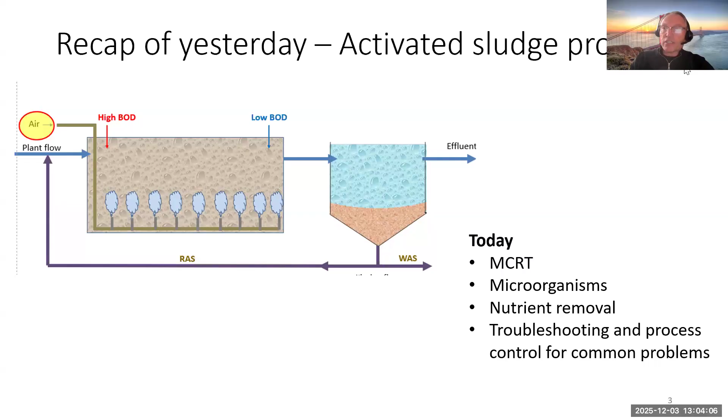We had a couple of questions yesterday, good questions that had us thinking, and we're going to address those coming up next. But just as a reminder here, the food to microorganism ratio, we had 2 pounds formulas. It was the pounds per day of BOD coming in divided by the pounds of mixed liquor volatile suspended solids, the biomass that we maintain in the aeration tank.

Now, the two questions we had, I did some research, and one of the questions was, can algae or vegetation growth occur in an active SBR, sequencing batch reactor cell, and how could it impact treatment? I did some research on this, and yes, algae growth can happen in a sequencing batch reactor. The characteristics of an SBR are that all of the functions, aeration and settling, and the return flows, it all happens in one tank.

And so you have these modes where you have it idle, you're filling it, then you aerate, and then you stop aerating and let it settle. So it all occurs in one tank, and it's a good solution for small systems. It's got a small footprint, but it's a little bit different operation to a continuous flow. Often systems will have at least two of these so that one can be filling while the other is treating, because wastewater never stops coming in from the collection system.

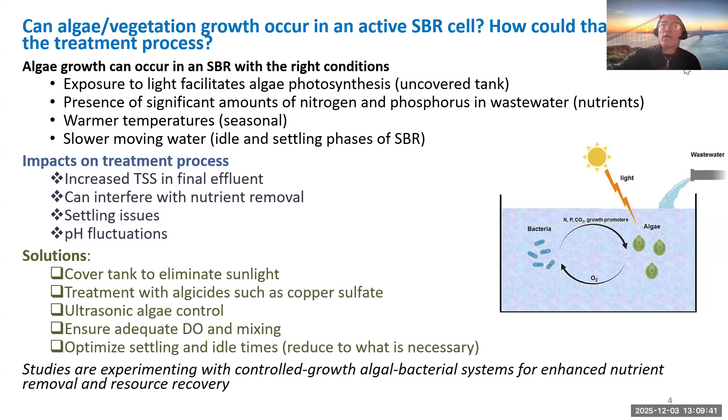And the other question was, Daryl partially answered this yesterday: can you speak on the historical justification for a 5-day incubation period in the BOD test? I had kind of wondered that myself, but for some reason never really took the time to look it up. As Daryl mentioned yesterday, historically it was the time for the wastewater to travel from the Thames River to the ocean, but there are some other justifications, reasons why this 5-day test occurs.

First of all is biological. The organic matter, the biodegradable organic matter, which is the BOD basically, is mostly consumed within a 5-day period. That's probably the more easily biodegradable matter. So after 5 days, you have a good idea of what your carbonaceous oxygen demand is. That's another way of saying the oxygen that is needed for bacteria and other microbes to consume the BOD.

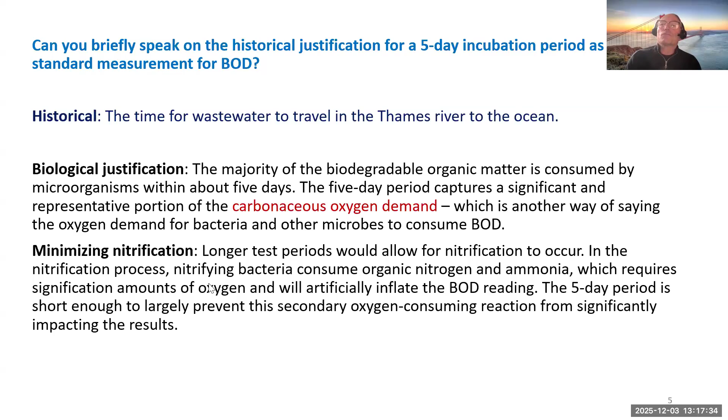All right, let's move on here, and we're going to start transitioning into discussing the mean cell residence time. As we just looked at here, we were talking about the F:M ratio. It's the pounds per day of BOD divided by the pounds of biomass in the tank, the MLVSS in the aeration tank. So we're trying to balance the food to the microorganism population.

In the MCRT, we're trying to get an answer of how many days the solids are remaining in the system. If you remember, we talked about yesterday, the effluent, the liquid, just travels continuously through the system, through the primary clarifier to the secondary clarifier, to the effluent. It's a continuous path, but the solids remain in the system longer because we're recirculating a portion of the solids in the return activated sludge back to the aeration tank.

So we're looking at the total pounds of mixed liquor suspended solids in the system divided by the pounds per day of solids leaving the system. So you notice in that MCRT formula, the pounds will cancel out, leaving only days. So you're going to get an answer in days. And the longer solids remain in the system, it changes the characteristics of the activated sludge.

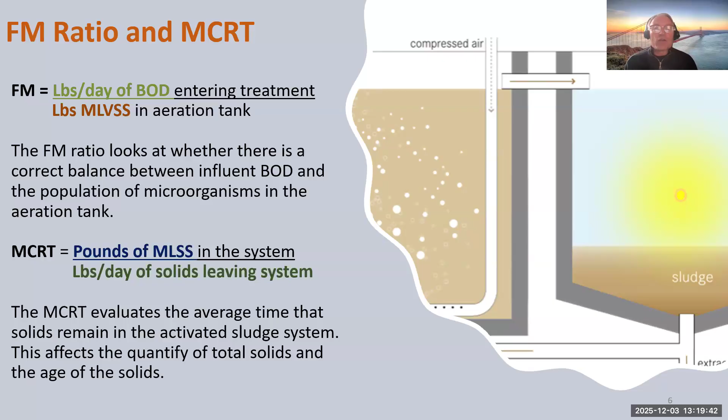There's a couple other things to think about, and we'll talk about this more a little bit farther into the presentation. But if you hold your sludge solids a little longer, it gives time for certain types of bacteria, nitrifying bacteria, to grow and develop. If you hold the solids too short of a time, you might not get good nitrification of the ammonia. If you're too short or too long, it can affect settling, and it can also affect the types of microorganisms that are in the activated sludge.

If we go over our process again, here's our incoming food and our return activated sludge flow going to the aeration tank. We're holding a certain concentration of MLSS in the aeration tank, the mixed liquor. We're maintaining a certain number of pounds of mixed liquor suspended solids.

We're settling out the biomass in the secondary clarifier, and we're recirculating. That circulation path helps us maintain the solids in the aeration tank. And then we have the waste activated sludge flow. That's how much we waste.

The waste activated sludge flow has the biggest impact, or the main impact, 99.99% of the impact, on how long the solids remain in the system, and also the overall amount of solids that are maintained in the system.

So if we increase the waste activated sludge flow, it's going to reduce the total time. It's like a detention time. We might be holding our solids for 8 days average before they leave the system. And if we increase the waste activated sludge flow, we might reduce it down from 8 days to 7 days, for example.

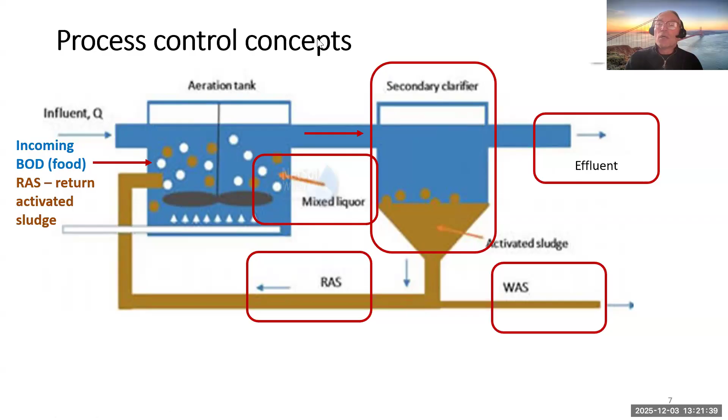And then, of course, the solids would go to some kind of solids handling. So these two process control calculations, it's not like you would do one or the other. You would do both of them. The FM ratio is balancing the biosolids you're retaining with the incoming BOD, and the MCRT is determining the amount and age of the biosolids that we're retaining in the system. We're basically trying to get these within the design specifications of the plant.

The mean cell residence time here - average time in days that the microorganisms remain in the activated sludge system. And there's our equation, the total pounds of MLSS under aeration. So we're going to have a pounds formula. And then the pounds per day of solids leaving the system.

That is mainly due to the waste activated sludge flow. And pounds per day of solids leaving the system, that's another pounds formula. So we're at least going to have 2 pounds formulas to calculate this MCRT.

Now, some solids also can leave in the effluent. If you look at an NPDES permit, you might see something like you have a limit of 20 milligrams per liter maximum allowable suspended solids in the effluent. And let's say you're achieving better than that. You have your effluent solids down to 11 milligrams per liter, which is probably successful treatment, but still there's some degree of solids leaving. So we can also account for those.

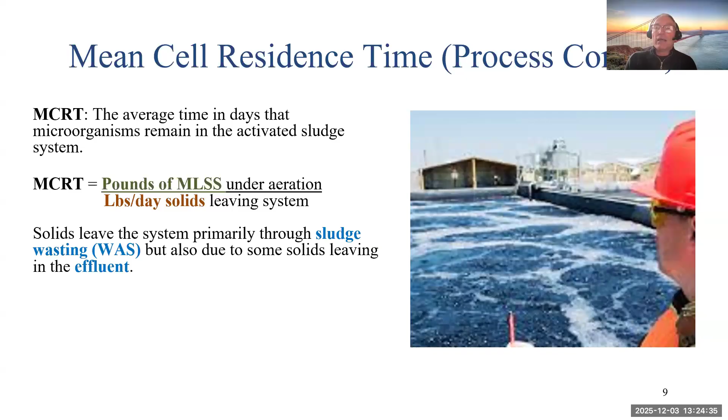And then we're going to do an example, at least one example, where we account for all of the solids - in the aeration tank and the clarifier, and the solids leaving through waste activated sludge flows and through the effluent. That is a more involved calculation. And that would be the type of calculation that you would see on a certification exam.

But for process control, you may be able to get by with just looking at the aeration tank volume and the waste activated sludge flows. And so if you look at that MCRT formula, you see the pounds per day of solids leaving the system - that's mostly due to the waste activated sludge flow.

So if you want to increase the MCRT from say 6 days to 7 days, you would actually decrease the wasting. That would be like a fraction, going from a quarter to a half - a half is larger than a quarter, and of course the opposite is true. If you need to decrease the MCRT, you would increase the wasting.

And it makes sense conceptually too, right? You're going to waste more, and so the sludge is going to be retained in the system a smaller period of time.

So I'm going to do an example here with you. Hope you have your calculators and your scratch pad and pencil or pen close by. We're going to do a kind of a conceptual problem here. We have a conventional activated sludge plant, and it has a total of 36,000 pounds of mixed liquor suspended solids under aeration.

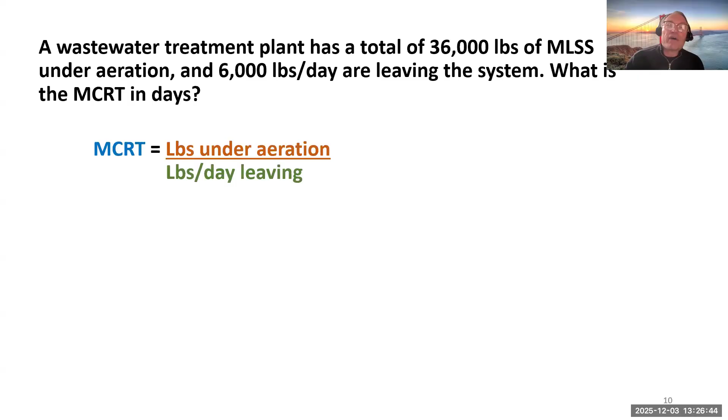I see a lot of answers here, 6 days, and you're right. This is conceptual: the pounds in aeration divided by the pounds per day leaving. I've drawn a little diagram here. So we plug in our numbers. 36,000 divided by 6,000 is 6 days. The pounds cancel out, leaving only days. So this is the simple version of the problem here.

Now we're going to get into a problem that's a little more realistic, but still we're only going to account for the aeration tank volume and the waste activated sludge flow. If you have a small plant and you're not carrying a lot of sludge in your clarifier, let's say you had more than one clarifier and you had significant sludge blankets, this might not be as effective of a process control formula. But if you just have a treatment train with one aeration tank and one clarifier, and you're keeping your sludge blanket below 2 feet, between 1 and 2 feet, you could probably get by with just calculating the aeration tank volume and the waste activated sludge flow for process control.

You'd be able to see if it's increasing or decreasing over time. Once again, for a certification test, you're going to want to include everything, and I'll show you how to do that in a moment here.

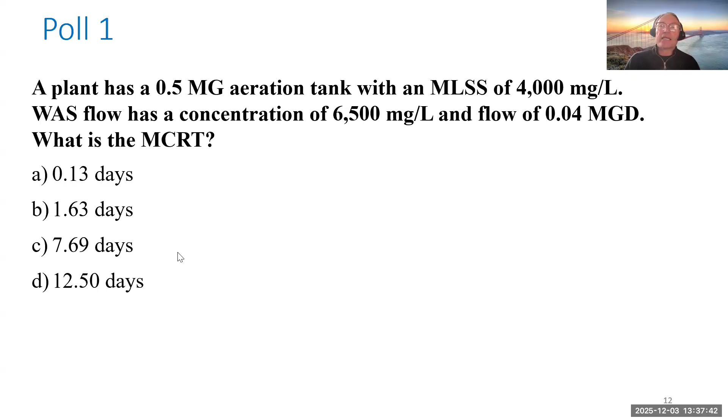Okay, in the poll, it looks like 82% said 7.69 days. And remember, we're tricky—we might make some of the answers match common mistakes. Let's look at the solution to this here.

I've drawn a little diagram here of the aeration tank and the clarifier. First, we're going to look at the total pounds of MLSS in the system, and we're just looking at the aeration tank—that's the only information we have. It's 0.5 MG and it has a concentration of 4,000. So that's a pounds formula: 0.5 times 4,000 milligrams per liter times 8.34 pounds.

I want to look at this question here real quick. MB is asking that they understand the importance of the calculation, but how can it be applied to a small plant that may not waste daily? That's a good question—it's intermittent wasting. For example, one of my plants is 0.036 MGD and only gets about 6K of flow daily, and I may go a month without wasting sometimes. When I do waste, I let it thicken overnight in the clarifier with no RAS flow. My waste is sometimes 2% solids.

There is a way... it seems your particular plant is a little more extreme version of intermittent wasting. But the flow of waste activated sludge can be continuous—that's the ideal situation for a conventional plant.

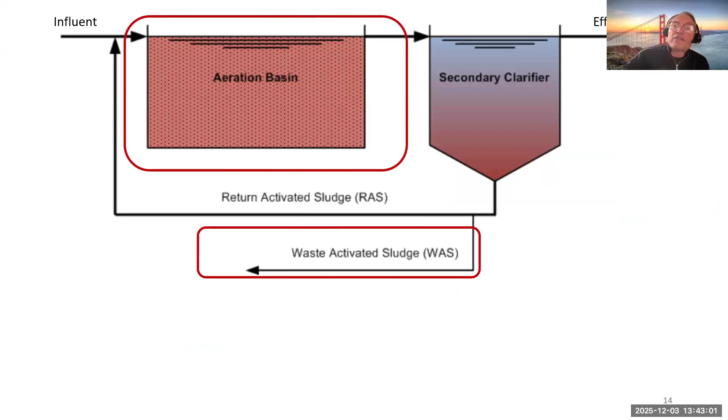Our aeration basin and our waste activated sludge are the main components in the MCRT, but you might need to include the secondary clarifier volume to obtain a more true and accurate MCRT, especially if you have a significant sludge blanket. If the sludge blanket is kept at like 1 foot, you can really just drop it for practical purposes, but if there's a significant amount of solids, you'd want to include it.

I included a link on this slide to a good blog, and you'll have this if you have the slide handout. It goes through all the different process control formulas. I think it might be a good reference for you to keep. There's also a references sheet that we put together for this training that has activated sludge manuals and process control manuals that goes beyond what we were able to cover in just this class.

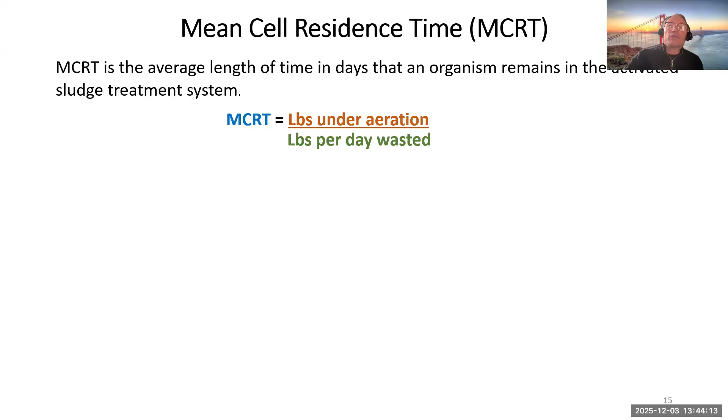So here's our MCRT, the pounds under aeration divided by the pounds leaving. Now, if we look at the pounds of solids under aeration and we include the secondary clarifier, that's going to change our formula a little bit. So the pounds of solids under aeration includes the solids in the aeration tank and the secondary clarifier. And the solids leaving include the solids leaving in the effluent, just a little bit hopefully, plus the solids leaving in the waste activated sludge flow.

So what would that look like if we include all those? Here's what the top of the equation looks like. The pounds of solids under aeration - we would simply add the aeration tank volume plus the clarifier volume, the operational volume of the clarifier, and we would use the same mixed liquor suspended solids concentration for both. Because in the aeration tank, you have a certain MLSS, and it's all churned up and mixed, and that pours right into the clarifier. The clarifier does separate the solids from the liquid, but as it goes in there, it has the same MLSS. So all you have to do on the top is add the volume of both of those.

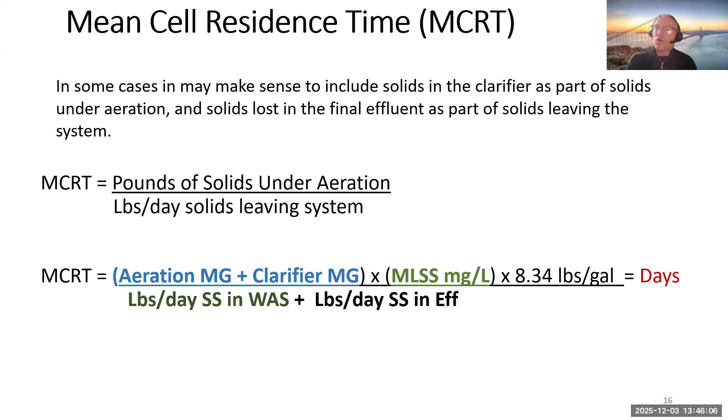On the bottom, the solids leaving, you have two pounds formulas now. You have the pounds per day of suspended solids leaving as waste sludge, plus the pounds per day of solids leaving in the effluent. Now, the flow of the waste activated sludge is a waste activated sludge pump flow - that's going to be different than the plant flow. But the pounds per day of solids leaving in the effluent uses the plant flow. So if the plant flow is 1 million gallons per day, you would calculate the solids leaving in the effluent using that plant flow, and I'll show you an example here.

So you have 3 pounds formulas to calculate this. I'm going to give you an example here - it's going to get a little bit cluttery on this slide, but I'm just going to show you how you would do it. So we have a plant flow of 3.25 MGD, a 3.25 million gallon per day plant.

And we have some effluent suspended solids still in the effluent, 21.2 milligrams per liter of TSS. The aeration tank volume is 1 million gallon. The MLSS concentration is 2050. The operational volume of the secondary clarifier is 0.25 MG. And we have the waste activated sludge flow, 0.055 MGD, and the concentration, 7,980 milligrams per liter.

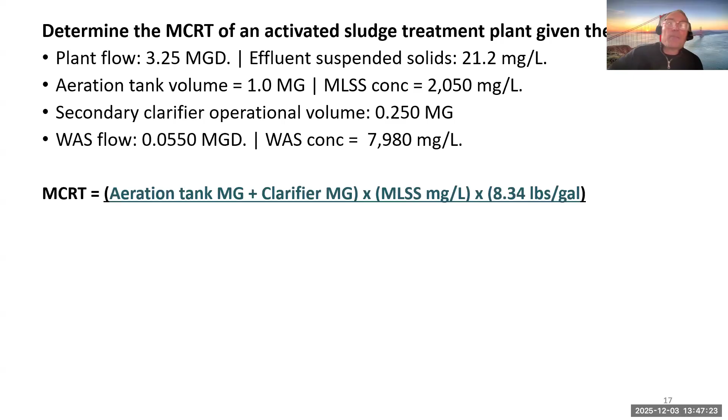Now, let's plug these into that formula and see what it looks like. First, on the top, we have the aeration tank volume, which is 1 MG, plus the clarifier volume, which is 0.25. The MLSS is going to be 2050 for that pounds formula. On the bottom here, for the waste activated sludge solids, we have the waste activated sludge flow 0.055 times the concentration 7980 times 8.34, plus another pounds formula at the bottom.

The effluent is going to be the plant flow, 3.25 mgd times the effluent solids, 21.2. If we plug all the numbers in, here's what it's going to look like: the tank volume plus the clarifier volume on top, times the MLSS, and on the bottom we have the 2 pounds formulas. You see the pounds formula on the left for the waste activated sludge flow, 0.055 times 7980 times 8.34. We're going to add that to the solids leaving in the effluent, 3.25 times 21.2 times 8.34.

Anyone want to take a shot at solving that? Those 3 pounds formulas and doing the division? I see answers coming in. Okay, 5, 5.1, 5.05.

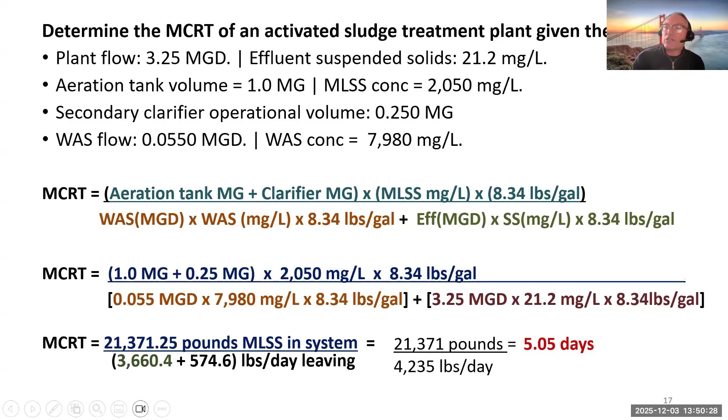Now, the average time for MCRT can range between 5 and 10 days on average. There are plants that can be a little shorter than that, so there's a lot of variation. Every plant's wastewater treatment is almost an art as much as a science, because each wastewater plant's quality, the environment, the temperature, even the materials used in the tanks, the aeration and so forth, those all have an effect. So every plant is a little different, but in general it can range from 5 to 10 days.

And you'll typically have a target MCRT that you're trying to achieve.

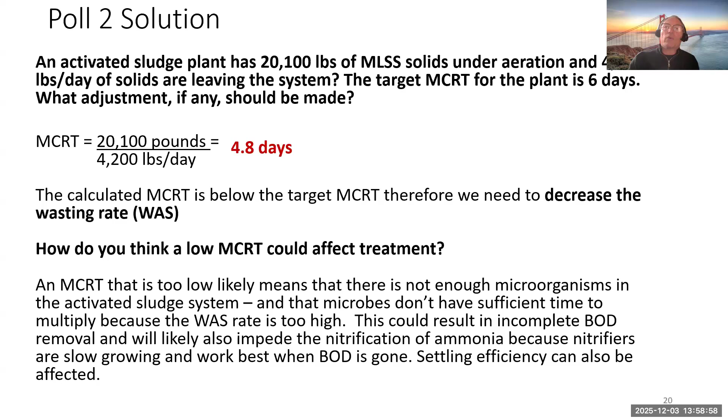And once again, this does affect settling. So you want to control the MCRT within that target range because you're trying to optimize the health of your biomass and the settleability of your sludge. If you hold it too long, you can have sludge bulking or different types of microorganisms. If it's too young, you tend to get microfloc.

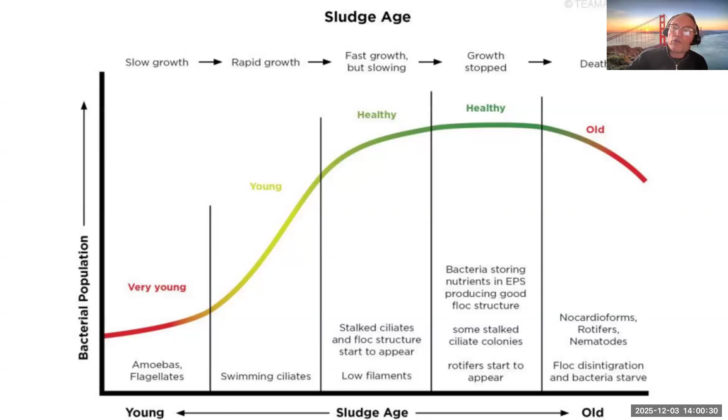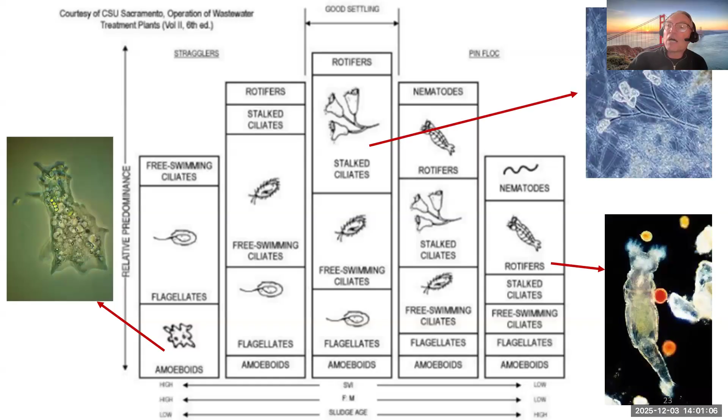Here's a diagram of the microorganisms you'd see at a very short MCRT. You'll see things like amoeboids and free-swimming ciliates. Here's what an amoeboid looks like. You'll see stalked ciliates when you're in that sweet spot for activated sludge, and you might see one or two rotifers. But if the sludge is very old, you're going to start seeing a lot more rotifers, which would tell you by microscopic examination that your sludge is getting too old.

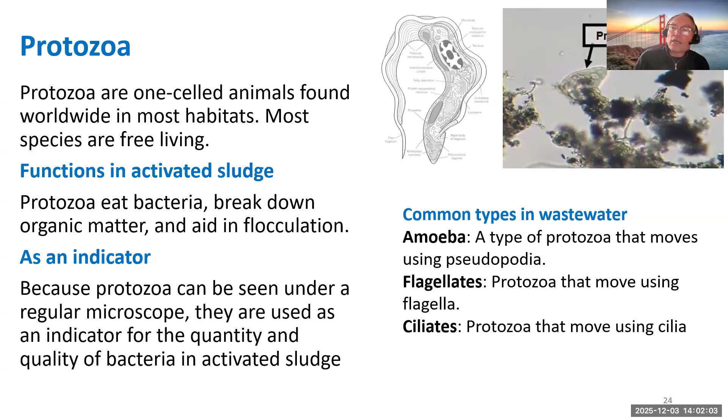We'll look at a couple of functions and characteristics of microbes actually in wastewater. First, there's protozoa. These can occur as the wastewater gets a little bit older, and they actually consume bacteria. They're a good sign of healthy wastewater, an indicator that you have a good amount of bacteria and healthy conditions. Protozoa are free-swimming like little animals, and there are different types: amoeba, flagellates, and ciliates. Some use pseudopodia, which are like false feet, using their cell wall to walk around. Others use a little fin, and some use cilia to move around.

Bacteria is the star of the show in activated sludge. They break down BOD and aid in flocculation, forming kind of like a biofilm to form floc. There are different types: there's aerobic bacteria that require oxygen, and those are the type we want to propagate in our activated sludge. They're very efficient at consuming BOD.

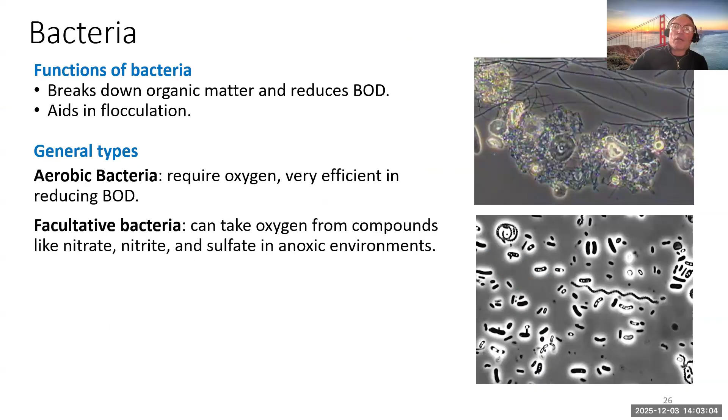There are also facultative bacteria that can use oxygen, but they can also remove oxygen from compounds like nitrate and sulfate. Then there's filamentous bacteria, which has good and bad parts. A little bit of filamentous bacteria can help form a nice, strong floc, like rebar in cement, helping to create structure for the floc. But if you have too much, if you have low DO or toxicity, you can get too much filamentous bacteria, and then your sludge won't settle well.

Then there's nitrifying bacteria. There's Nitrosomonas that convert ammonia to nitrite, that's halfway. Then Nitrobacter that convert the nitrite to nitrate, and they operate best at the end of the aeration tank when most of the BOD is gone.

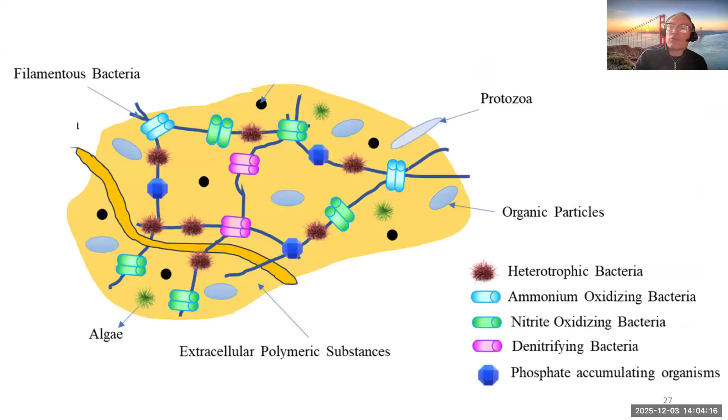You can see a diagram here of what a floc particle might look like with bacteria, showing different types like filamentous and other organisms creating a bacterial floc. The nitrifying bacteria process has two steps like we just mentioned, and getting rid of ammonia is very important in wastewater treatment.

There's two steps: your ammonia goes to nitrite, and then nitrite goes to nitrate. So it's a two-step oxidation process facilitated by nitrifying bacteria. We want to get rid of ammonia because it's toxic to aquatic organisms. You need good aeration for nitrification to occur. Here's the chemical reaction - ammonia can be expressed as NH3, but it can also be expressed as the ion NH4.

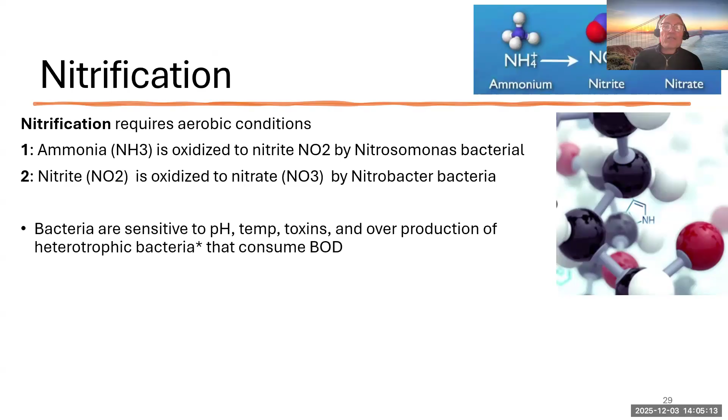Now, these nitrifying bacteria are a little more sensitive than the bacteria that consume BOD. So if you have real low temperatures, a little bit of toxins, or too high a population of bacteria consuming BOD, they won't be able to grow and function. At the beginning of the aeration tank, a lot of BOD is being consumed, and those bacteria are growing and reproducing. Near the end of the tank, the BOD is gone, and that gives a window for those nitrifying bacteria to grow and perform their function.

If you convert ammonia to nitrate, you haven't actually removed nitrogen, but you've converted it from a very toxic form to a less toxic form, and you might still be meeting your permit limit without doing anything in addition. However, if you had a permit with a nitrate limit that you were exceeding, you would also need to do denitrification to try to get rid of the nitrate.

So here's what nitrification looks like - you're going from ammonia to nitrate. But if you needed to denitrify, you would go from nitrate to nitrogen gas, and that occurs in an anoxic environment. Nitrification happens with a lot of DO, dissolved oxygen - it's an oxygen-rich environment. But denitrification works the opposite way.

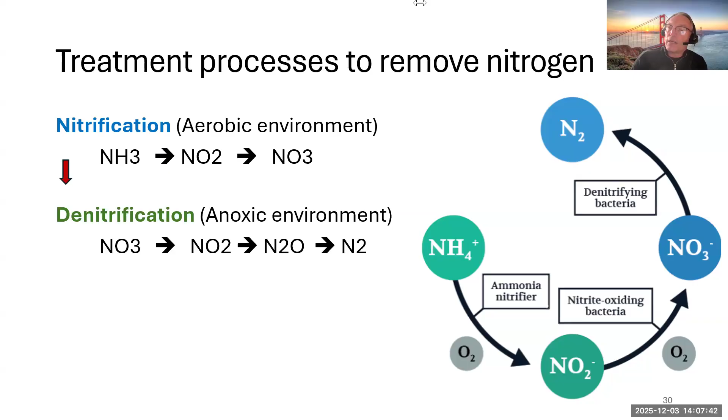The reason it does is because the bacteria that denitrify will consume oxygen if you give them oxygen. But if you put them in an environment where the only source of oxygen is for them to break down nitrate, they'll go in and break down that nitrate molecule. They'll take the oxygen from it, and it just leaves N2 gas, which bubbles off as gas. That's how you get rid of nitrogen. I'll go into that a bit more in a moment.

But for nitrification, you want to have good BOD removal. You're not going to get good nitrification unless you're removing at least 80% of the BOD, so it can start working. The DO needs to be at least 2 milligrams per liter of dissolved oxygen, and it needs to be in a temperature range - the ideal range would be about 77 to 86 degrees, but if it gets too cold, the nitrifying bacteria can stop working, and it's hard to get them restarted.

That's why some plants will use their biogas to heat, or they'll have their facilities in a heated building. As the temperature decreases, you get a decreased rate of activity. Your rate of activity might decrease, so you're getting less ammonia removal, and maybe you're still meeting your permit. But if you needed to increase performance, keeping the temperature up is one of the things you could do.

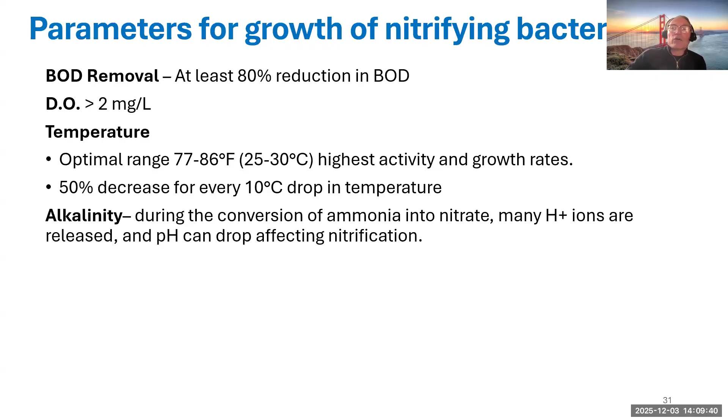Another thing you can do to improve nitrification is to hold the solids longer. We just calculated the MCRT, and we had a range there from about 5 to 10 days, the typical range for conventional activated sludge plants. For your particular plant, you might have a tighter range, but you might want to be closer to the high end, because that gives your nitrifying bacteria time to grow and populate. You also might want to have your FM ratio be a little bit more toward the low end. So if you have your FM ratio and MCRT set for optimal BOD removal but want to improve nitrification, a little bit lower FM ratio and a little bit higher MCRT might help.

This is showing the equation when ammonia is oxidized. You see it results in nitrate, water, and some hydrogen ions, so that could reduce the pH. And for every 1 milligram per liter of ammonia that's converted, about 7.14 milligrams per liter of alkalinity is required.

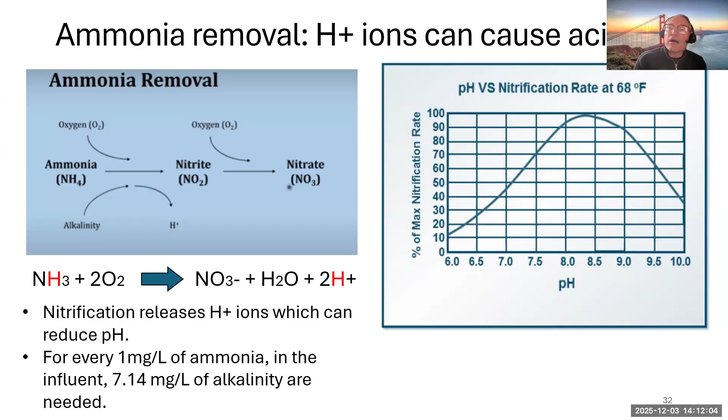This chart shows pH versus the nitrification rate, for a particular temperature - every temperature would be a little bit different. You can see the max nitrification rate improves as you increase the pH, and it's reduced as the pH goes down. At a pH of 6, which would be pretty low but could occur if you had very low alkalinity as you're nitrifying, it's only about 12% of the maximum nitrification rate. That doesn't mean you still can't nitrify, it's just slower, but low pH could affect it. At 7.5, we're getting about 70% of the max nitrification rate. So warmer is better, and a pH closer to 7.5 to 8.5 is actually the best.

I'm going to give you an example here. We have a wastewater plant with raw wastewater that has 150 milligrams per liter of alkalinity, and 15 milligrams per liter of ammonia. Let's calculate how much alkalinity would be used up by complete nitrification of the ammonia, and how much alkalinity will be left over.

Here's the alkalinity used up by nitrification. We take the 15 milligrams per liter of ammonia, and remember about 7.14 parts of alkalinity is used up for every part of ammonia. So 15 times 7.14 gives us 107.1 milligrams per liter of alkalinity, measured as equivalent to calcium carbonate. We started out with 150. So the alkalinity remaining, we take that original 150 milligrams per liter and subtract the 107 that's used up, and we have 43 milligrams per liter of alkalinity remaining. At least we have some alkalinity remaining, but it is a little bit low. In general, we'd like to see at least 50 milligrams per liter of alkalinity remaining.

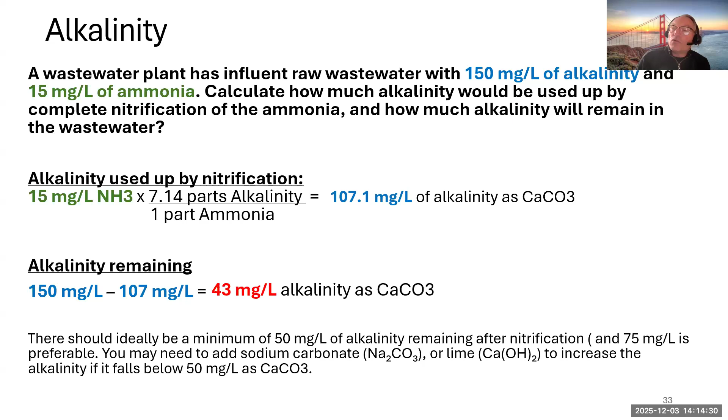So in some cases we may need to add some kind of adjustment, such as lime, to improve nitrification. For nitrification, we need adequate temperature, enough alkalinity, a pH ideally above 6.8, and sufficient DO because nitrification uses a lot of DO. We also want enough solids - held in great enough abundance and long enough to promote the growth of those bacteria. And they're particularly sensitive to toxins.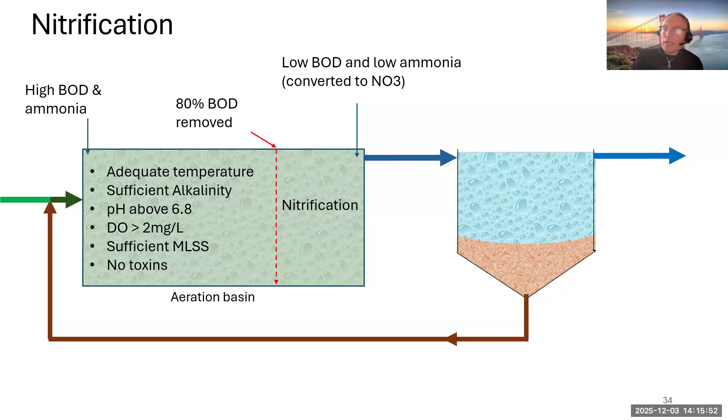As we go from left to right in our aeration tank, we're going to get to a point where the nitrifying bacteria start to function better and better, at the point where at least 80% of the BOD is removed. So at the end of the tank, before we discharge into the secondary clarifier, we have either very low or no BOD left and very low or no ammonia left. We don't have DO if we've timed it right, but we do have nitrate, NO3, in the wastewater.

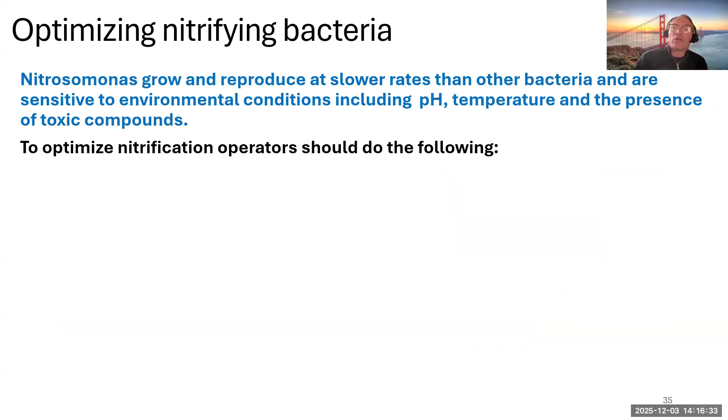And then we have our activated sludge microorganisms. We want to keep them healthy, so we're not going to keep them in the clarifier for a long period of time. And we want to focus on optimizing these nitrifying bacteria. They grow at a slower rate, and they're very sensitive to things like pH, temperature, and toxins. So maintain a sufficient sludge age, use a higher biomass and a lower F/M ratio, control the pH, and maintain at least 2 milligrams per liter of oxygen, and try to prevent toxins from entering the system.

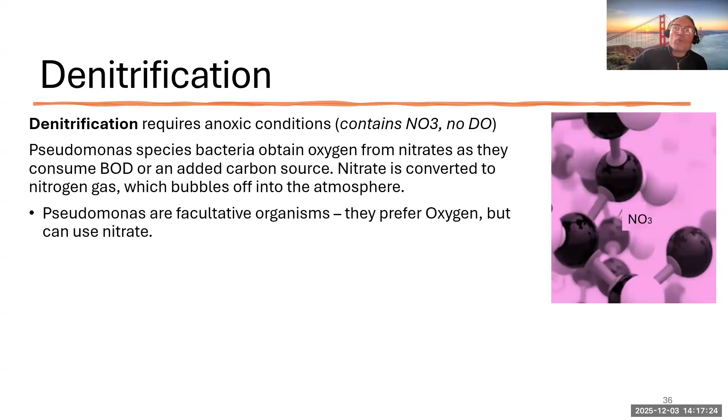Now, denitrification. Remember, at the end of that tank we were left with nitrate but no DO, and that's exactly what denitrification requires, because the Pseudomonas bacteria are going to take the oxygen from the nitrates, and when the oxygen is gone, the nitrate is just nitrogen gas, which bubbles away. These Pseudomonas are facultative—they prefer oxygen, but they can use nitrate. So they biologically reduce the nitrate to nitrogen gas, using special enzymes to strip the oxygen molecules from nitrate.

Now, the trick is that they require some kind of BOD or carbon source. Why is that? Because they need to eat. If they didn't have something to eat, they wouldn't need oxygen. It's just like with BOD—the bacteria see a piece of BOD there to eat, and they go eat that piece of BOD, but they need oxygen to accomplish it. Same with these denitrifying bacteria: they see a nice piece of carbon or BOD, and they need oxygen, so they strip it from the nitrate.

The problem is, by the time we get to the end of the aeration tank, the BOD is gone, so there's nothing there for them to eat. So what reason do they have to strip oxygen from the nitrate? If we look at our plant here, at the end of the aeration tank we have low or no BOD, and we don't have any ammonia left—it's converted to nitrates.

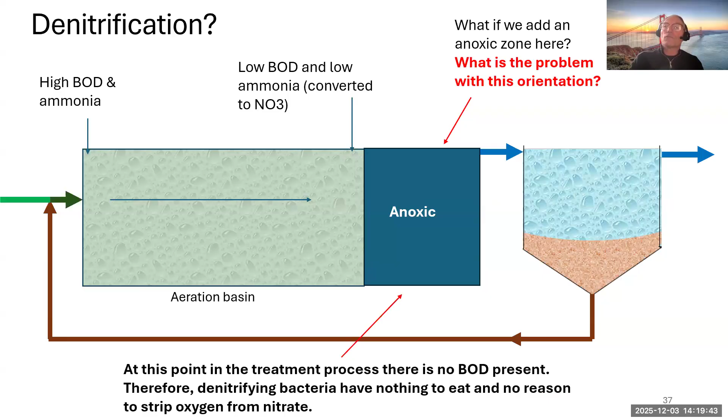So how can we solve this? There are a couple different ways. One is to place the anoxic tank at the beginning, so the incoming wastewater flows through the anoxic tank and then into the aerobic tank. By the time we get to the end of the aerobic aeration tank, the BOD is gone and we have nitrates. We recycle it back to the beginning where there is BOD—so it's a continuous cycle.

So that's one way, and this is a biological process using the naturally occurring BOD. The denitrifying bacteria can now consume the BOD and use the nitrate, and then the gas will bubble off.

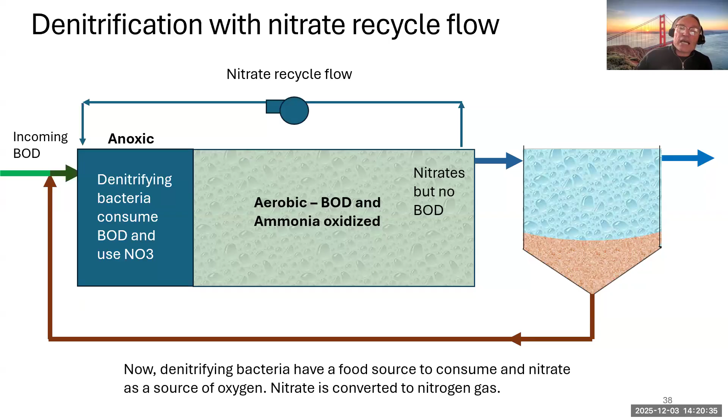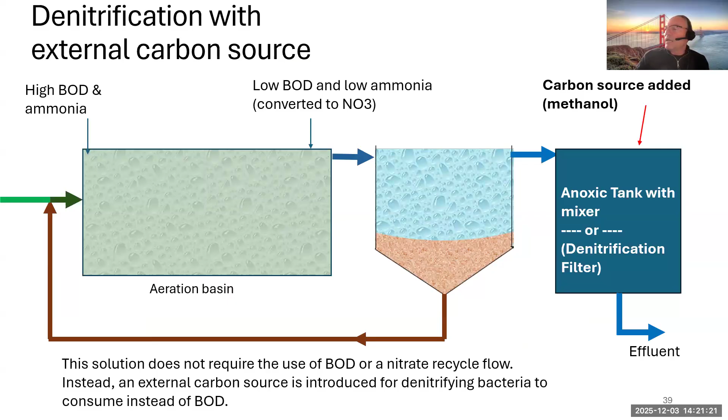Another way is to use an external carbon source. So you get to the end of your aeration tank with low BOD and low ammonia, and you can use an anoxic tank where you add an external carbon source, such as methanol. You don't have to use BOD in this situation—you can use an external carbon source, and there are many different ones that can be used. Methanol is the most common; it's effective and useful, but it does add some additional expense.

With a sequencing batch reactor, a lot of times we can have some flexibility of control because it has a series of steps. It's just like an aeration tank, but it also acts as a clarifier.

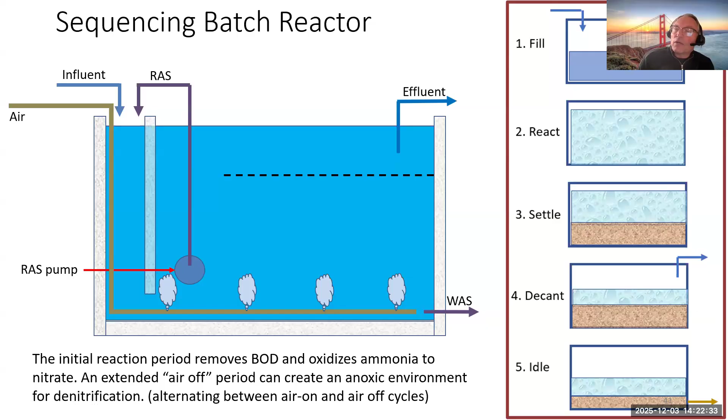You see the five steps of a sequencing batch reactor. You have the fill, and then you react by turning on the air. Then you settle it by turning off the air, and you have some decanting where you're pulling off the effluent and some of the waste activated sludge solids, and then it sits idle and fills again.

By controlling the length of time of each of these cycles, you can control or create the conditions for nitrification and even denitrification to occur. For example, if you had an extended time where you left the air off, you could create an anoxic environment that would allow denitrification, or just alternate between air on and air off cycles. There are some case studies on this, and it should be in your reference sheet.

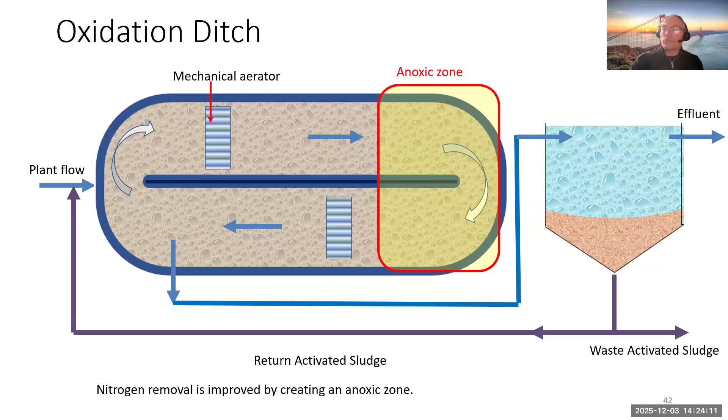For example, that aerator on the top would be turned off periodically. It could create an anoxic zone right in the same basin. So you're aerating and nitrifying the bacteria, then you have an anoxic zone that you maintain, and then denitrification occurs, and the nitrogen can bubble away. So those are modifications to existing plants that can help.

Denitrification is a little more forgiving than nitrification. It occurs across a wider range of temperatures and pHs, so it's less sensitive, but you have to have enough carbon or BOD for it to have something to eat. It actually adds alkalinity back because it releases hydroxide ions.

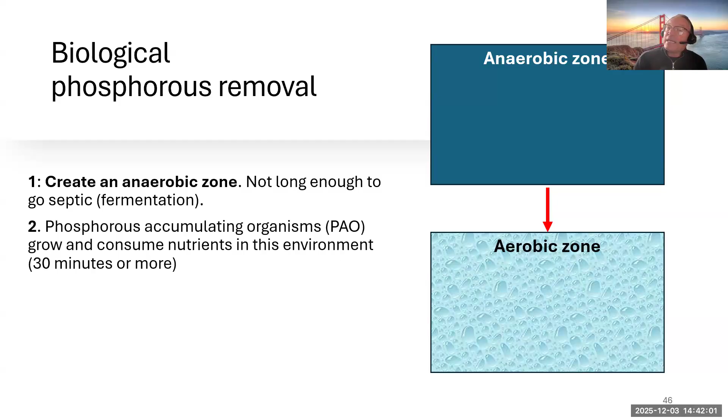So the phosphorus accumulating organisms, PAOs for short, grow and consume nutrients in the anaerobic zone environment. Then once they flow to an aerobic zone where you have plenty of DO, they actually uptake phosphorus. Once they accumulate the phosphorus, when you remove sludge, you're also removing phosphorus.

It's biological phosphorus removal. As you can imagine, in an activated sludge plant, you're recycling some sludge back to the beginning too, so you're removing a portion all the time instead of 100% of the phosphorus. But the idea is to knock the phosphorus down below your permit limit. There's lots of different permit limits for phosphorus.

There's some plants that need to remove phosphorus down to a 1 milligram per liter level. Other plants in certain places are required to get phosphorus down to a 0.1 milligram per liter level. Most likely, biological phosphorus removal is not going to be a possible alternative for a very low removal, just because you're recycling all the time and you're depending on an anaerobic and an aerobic environment to accomplish this. But it can work, it's just probably not going to be effective to get you to a really low level.

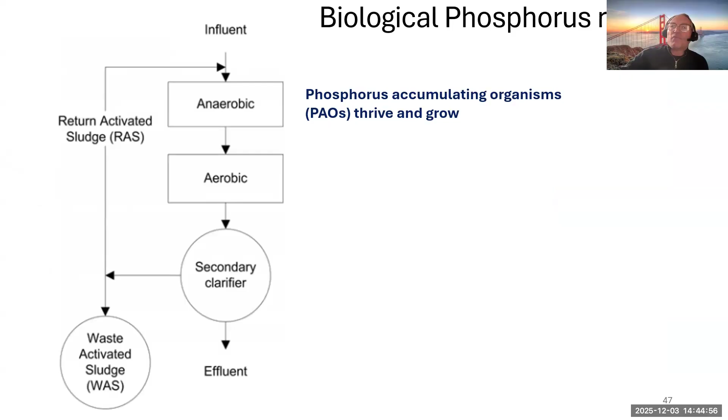So here's the steps of biological phosphorus removal. You have this anaerobic zone with no oxygen at all, where the phosphorus accumulating organisms are thriving and growing. Then they're introduced to an aerobic environment, and these phosphorus accumulating organisms uptake phosphorus. Then they're settled in the secondary clarifier, and a portion is removed through waste activated sludge flows. Sorry, I skipped a little bit too fast there. So that's the basic process for biological phosphorus removal.

If you were trying to remove both phosphorus and nitrogen, remember to remove nitrogen you have nitrification of ammonia, converting ammonia to nitrate, but you haven't removed it yet. So to remove nitrogen, you have to have nitrification and denitrification. So you see there's three different environments in this diagram.

There's the anaerobic basin, where there's no oxygen source at all. That is to prepare the phosphorus accumulating organisms. And then you have the anoxic and the aerobic environment here.

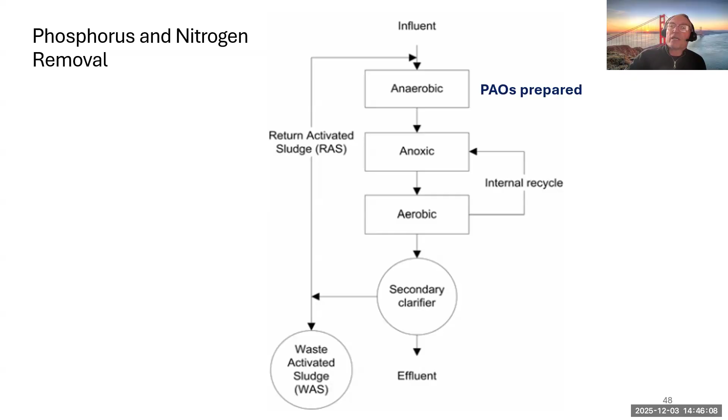In the aerobic portion, you have three things going on: BOD is being consumed, ammonia is being nitrified to nitrate, and that nitrate is recycled back to the anoxic environment where you have denitrification. That nitrogen is bubbling off in the form of nitrogen gas. But in the aerobic environment, you also have phosphorus uptake by the phosphorus accumulating organisms.

You want to have your DO be at least 2 milligrams per liter, and the effective range is between about 2 and 4 milligrams per liter. You might see some improved nitrification and improved phosphorus uptake if you increase the DO a little bit. But once you get to, in general, about 4 milligrams per liter of oxygen, if you go above that, you're probably just wasting energy, using more energy than the benefit you would get out of that.

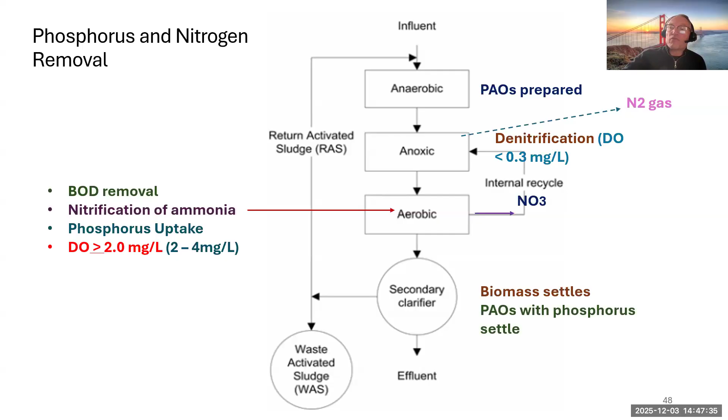And the biomass that settles in the secondary clarifier includes organisms with phosphorus, and a portion of those are wasted with the sludge.

Oxidation ditch can also be modified to remove both nitrogen and phosphorus. As we saw before, we can create an anoxic zone by alternating one of the aerators on and off. One plant put an oxygen sensor at a certain point in the oxidation ditch, and they operated their mechanical aerator with a VFD, a variable frequency drive, which allows you to run your motor at a variable speed. So they were able to run the aerator at the right speed, time, and duration.

Just to maintain enough oxygen so it would run out just before the anoxic zone. They had a sensor, a VFD, and a SCADA system that did this. This was just a couple operators, and they decided to do some experimentation to try to make their plant meet their nutrient removal limits. They were going to have to spend about $6 million, which the community didn't have - it was just a small community. These operators found a way to make their oxidation ditch into a nutrient removal plant just by doing some of these adjustments.

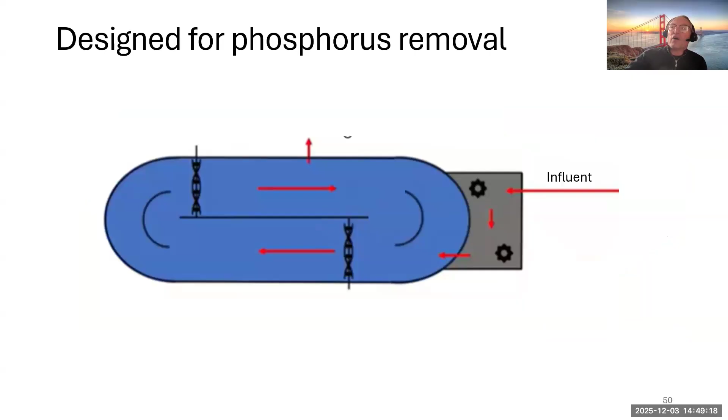Now, if you wanted to modify an oxidation ditch to just remove phosphorus, you could create an anaerobic zone at the influent where there's no oxygen, to prepare the phosphorus accumulating organisms before it enters the aerobic zone, the oxidation ditch. In the oxidation ditch, you'd be removing BOD and oxidizing ammonia, and you'd be having uptake of phosphorus by the phosphorus accumulating organisms. So just by adding that one zone.

If you wanted to remove both phosphorus and nitrogen, you could create an anaerobic zone, and you could create an anoxic zone. In the anoxic zone, you'd be recycling back into that zone, so you'd be running out of oxygen just before it re-enters that anoxic zone. You wouldn't be recycling back into the anaerobic zone - it would pass through the anaerobic zone as it enters. Then you'd be able to remove the BOD, oxidize ammonia to nitrate, and have phosphorus uptake in the aerated portion.

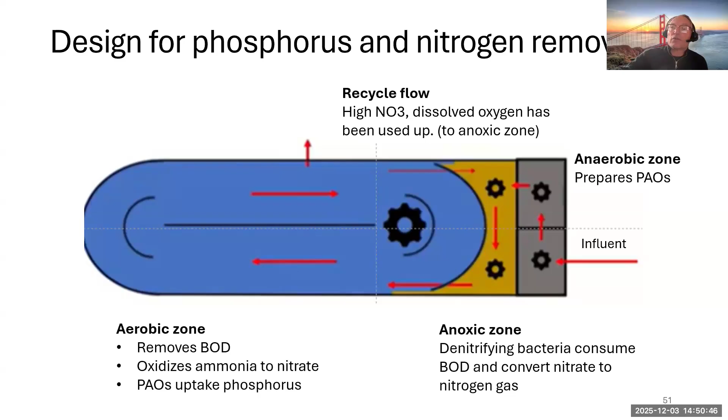So at the end of the racetrack, you'd ideally have your dissolved oxygen used up, but you'd have nitrates before it enters the anoxic zone, the yellow portion. And here's an actual

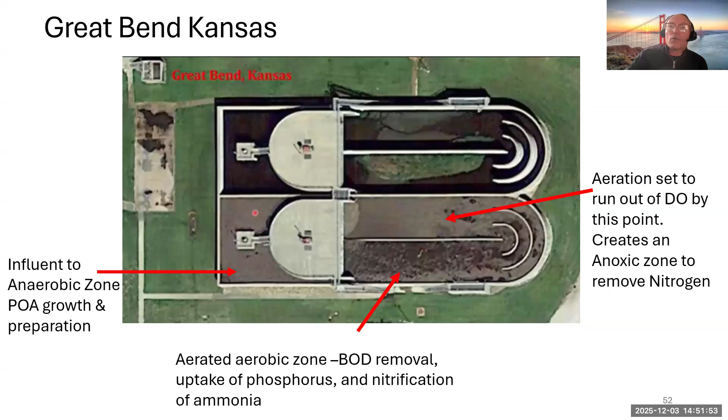You can also see on the left-hand side where that little laser pointer dot is, they've also created an anaerobic zone. So they're actually doing this by modifying the plant, and they saved their community a significant amount of money. They did some experimentation and added a SCADA system and an oxygen sensor so they could closely calibrate the nitrogen or nitrate recycle zone.

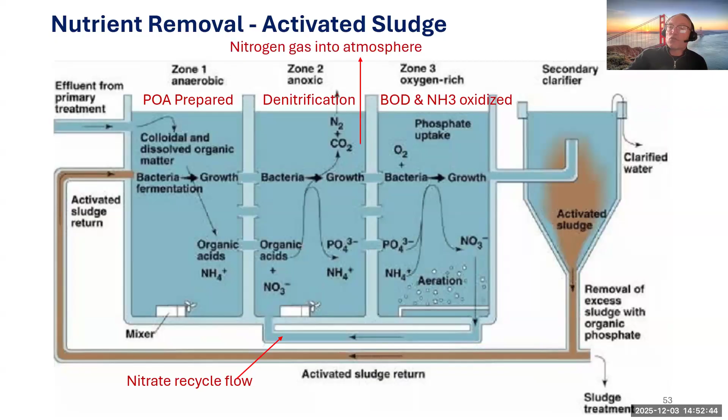In an activated sludge plant, a conventional plant, it could be modified like this: you'd have an anaerobic zone where the wastewater first flows through, then an anoxic zone, then the oxygen-rich zone which is like a regular aeration tank. You have a nitrate recycle flow going from the oxidized zone to the anoxic tank, so there's continual recycling. You'd be removing phosphorus and nitrogen biologically, the nitrogen gas would bubble into the atmosphere, and the phosphorus would be removed as a portion of the waste activated sludge.

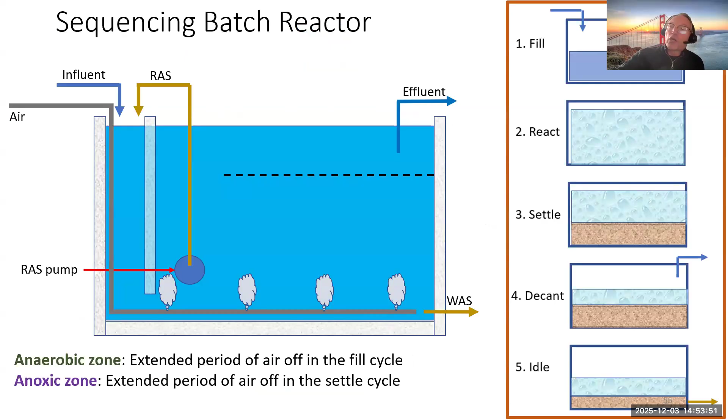With the sequencing batch reactor, you could create an anaerobic zone by having an extended period of air off at the fill cycle. You could rotate between react and air off, and air on and air off periods, to create an aerobic and then an anoxic zone. It would take some experimentation - you'd start with longer and longer air off cycles until you get the correct environment to denitrify and create that anaerobic zone without going septic. You can use process control in the form of an ORP probe, an oxidation reduction potential probe.

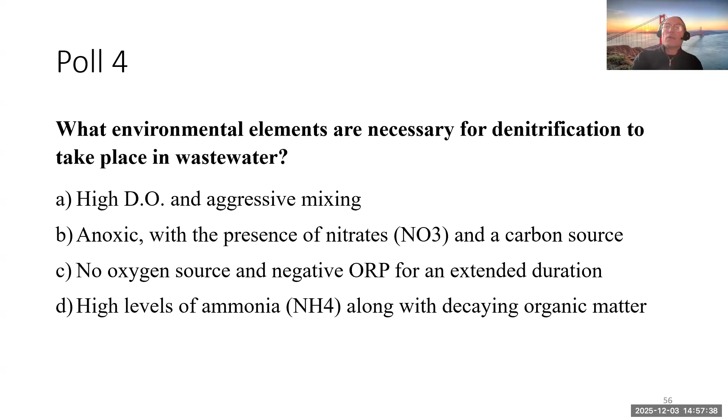84% of you said it needs to be anoxic with the presence of nitrates and a carbon source, and that is correct. The denitrifying bacteria needs some kind of food source, which is the carbon source, and nitrates. So in denitrification, you have special bacteria that will strip the oxygen from nitrate, leaving just nitrogen gas.

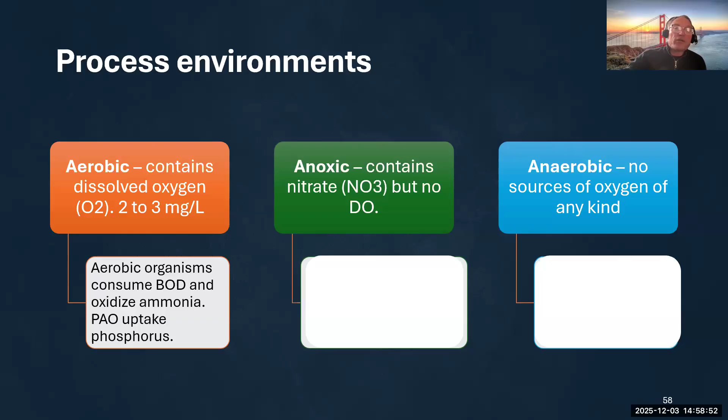There are basically three different types of environments here. Aerobic contains dissolved oxygen at a level of probably 2 to 3 milligrams per liter ideally, though you can get by with 1.5 milligrams per liter. The trouble is, for BOD removal at least, how well is it mixed? Mixing in a tank won't ever be 100% perfect, you'll have some spots a little bit lower. So if you have a little bit higher, like around 2, it can help you, but you don't want to go to the point where you're just wasting energy. In aerobic conditions with oxygen present, what's going on is BOD removal, ammonia oxidation, and phosphorus accumulating organisms uptaking phosphorus.

In anoxic conditions, there's nitrate but no dissolved oxygen, so denitrifying bacteria can strip oxygen from the nitrate, but it requires a carbon source. BOD, any organic material, is carbon based, or you can just add a source of carbon. In anaerobic conditions, there's no source of oxygen at all, and we use this to energize and grow our phosphorus accumulating organisms. It does require some BOD, typically the raw influent wastewater is what we're using.

Now we can measure these environments with an ORP probe, an oxidation reduction potential probe. A positive ORP value indicates an oxidizing environment, while a negative indicates a reducing one. So we can look at each environment and what the measurement would be. For anaerobic, we're usually looking at somewhere around negative 200 millivolts, aerobic is about positive 150 millivolts, and anoxic is somewhere around negative 100 millivolts in general.

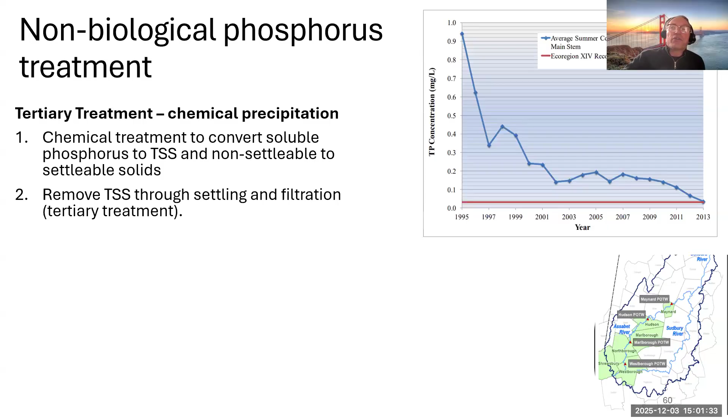Now for non-biological phosphorus removal, this is usually tertiary treatment. We're using some kind of chemicals to cause the solids in the water to clump together and settle out. So it's chemical treatment, and then you're using settling and filtration.

Here is the link to that particular study I was telling you about. You'll have this slide, but six municipalities within one watershed, the Assabet River watershed in Massachusetts, this river was impacted by phosphorus problems. Four different utilities served these six municipalities, and they all chose slightly different methods. It's an interesting case study, and some of the reasons they chose their methods were based on life cycle cost, including initial cost and operating cost. Some were going to increase chemical and electrical usage, while others minimized operational cost but had higher construction cost, and they had to look at impacts on labor and footprint. Some had plenty of area to build, others didn't have much area. All those factors were included, and the actual treatment process was also discussed.

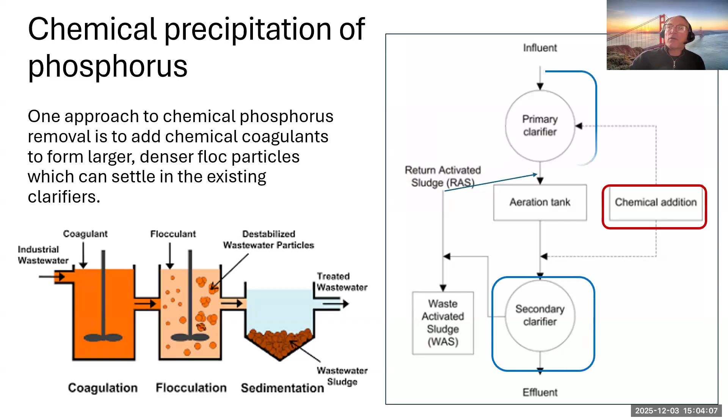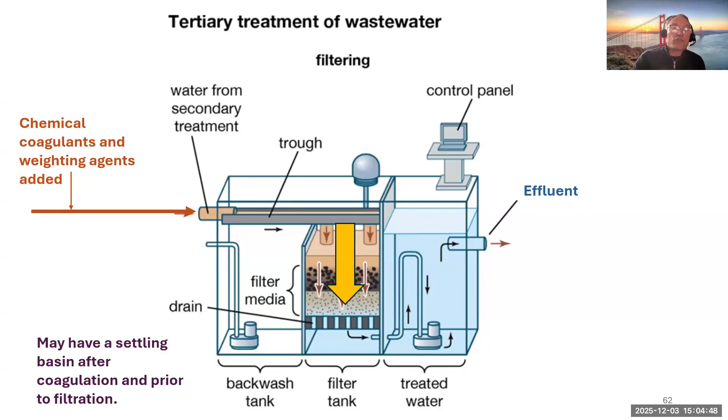A tertiary solution would be some kind of process added on or after the secondary effluent. The water comes in, and you have the treated water, the effluent from the secondary clarifier. You add chemicals to that, causing flocculation, where you can settle out the sludge or pass it through a filter to get more optimized phosphorus removal at the end of the tank. That's an example of tertiary treatment.

Now we're going to talk about some common things that can affect activated sludge. Some of these happen before the activated sludge process, like collection system problems such as I&I, which stands for inflow and infiltration. Those are sources of extra water coming into the collection system, either groundwater or rainwater, which can overload and even wash out the system. You have this massive amount of water that doesn't have the concentration of BOD in it, and this can happen during a rain event, causing problems.

You can also have toxicity. One system we worked with, a fairly small town, also served two state facilities that used harsh cleaning chemicals affecting their nitrifiers in the treatment process. So toxicity is one issue, and also if you have a slow moving collection system, you might have more ammonia, meaning the wastewater arrives already septic, which could cause problems with rising sludge and more difficulty removing all that ammonia.

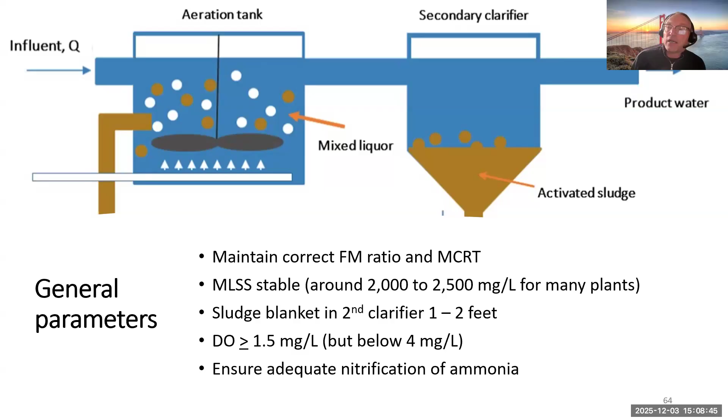In general, our process control parameters aim to maintain the correct F:M ratio and MCRT as close to target as possible, with a stable mixed liquor suspended solids, generally around 2,000 to 2,500 milligrams per liter for many plants. We want to maintain a sludge blanket at the right depth, sufficient DO, and ensure conditions for adequate nitrification, meaning our sludge age is long enough, we're consuming the BOD before it reaches the end of the tank, and we're not having extremes in pH, temperature, or toxicity.

One way to conduct a process control check is by doing a removal efficiency equation. You can do this with BOD, TSS, or ammonia: the influent concentration minus the effluent concentration, divided by the influent, will give you the removal efficiency.

Here's an example: if we had 325 milligrams per liter of BOD coming in, and the effluent BOD is 19, plugging those numbers in gives 325 minus 19 divided by 325, which converts to about 0.9415, or roughly 94% removal efficiency. This is something you could compare week to week or month to month to look for trends and see your overall efficiency, especially after making adjustments to the process.

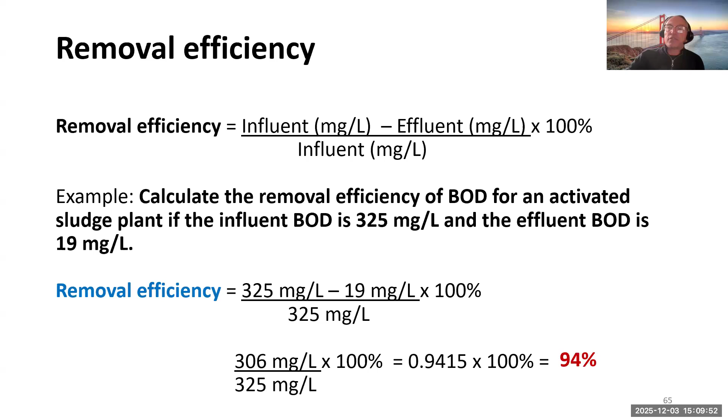So in the collection system, things that can happen if you have I&I, you can actually wash out your microorganism population. It can dilute the wastewater and starve the microbes, making them unhealthy. And of course, all your equipment is going to be working harder, and you're not going to have sufficient time for nutrient removal or BOD removal.

These types of things will enter the collection system, especially if you have industrial facilities discharging into your system. The way to handle that often is to work with the dischargers and ensure that they're adhering to their discharge permits themselves.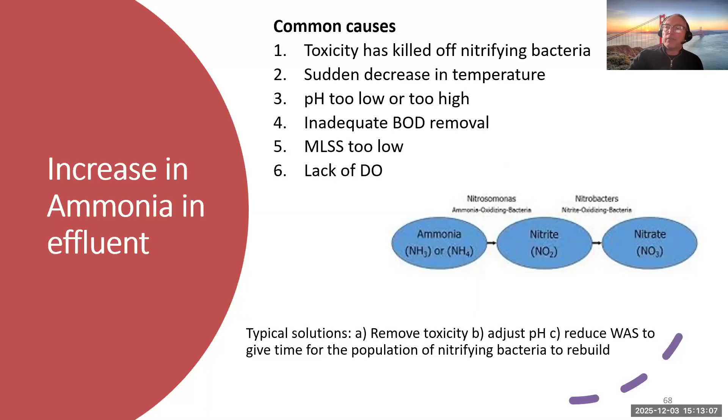For process control, one of the main things you want to measure for nitrification is DO. You want it to be at least 2 in most cases. Even though your compliance tests need to be official lab tests, for process control you can use a simple fish aquarium test kit.

You can look at the ammonia before and after, and as you make adjustments to, for example, DO or MCRT, you can look at the effects throughout the system before and after and in the process.

So while your DO needs to be at least 2 milligrams per liter in oxidation for nitrification, for denitrification in that anoxic environment you want it to be less than 0.3 milligram per liter of DO. You're going from the aeration tank, recycling back to that anoxic zone, so you're carrying some oxygen with you. But as long as it is less than 0.3 milligram per liter, you're still going to be able to have an effective anoxic zone. You also want to make sure your pH is stable.

Remember that equation to estimate the loss in alkalinity and the remaining alkalinity - you'd like that remaining alkalinity to be at least 50 milligrams per liter. And once again, a little higher on the MCRT range and a little bit lower on the FM ratio.

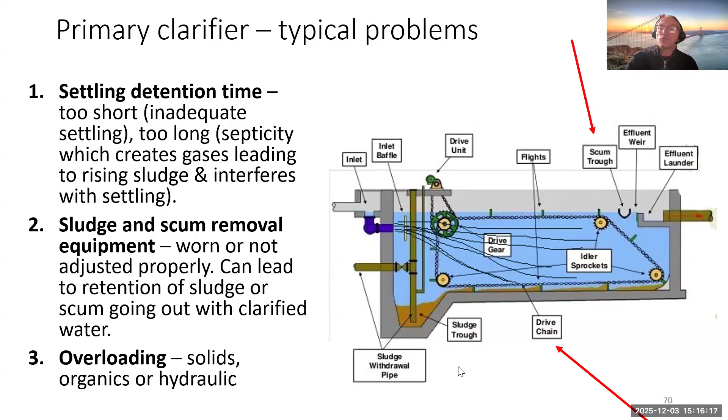Now, if you have a primary clarifier, it's fairly simple, but there are some things that need to be done thoroughly to prevent problems downstream. You have scum removal processes. The influent needs to be free of grit and screenings, and the primary sludge needs to be removed effectively.

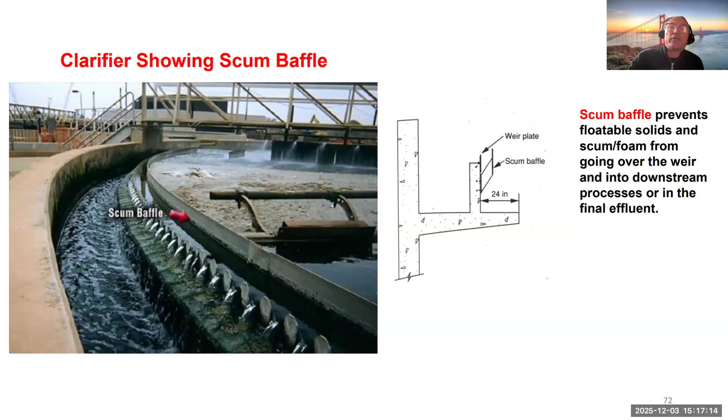Here's an example of a scum baffle. You see that arm going along, pushing that sludge to a hopper. On the right-hand side, you can see the little scum baffle at the effluent weir, keeping the scum out of the effluent and raking it to a scum hopper.

In the sludge removal equipment, some of the basic maintenance things would be replacing or adjusting the sludge scrapers, simple lubrication and adjustment of any mechanical alignment, or in the case of the rectangular clarifier, adjusting the chain. Those are important things that, if not done, can cause downstream problems.

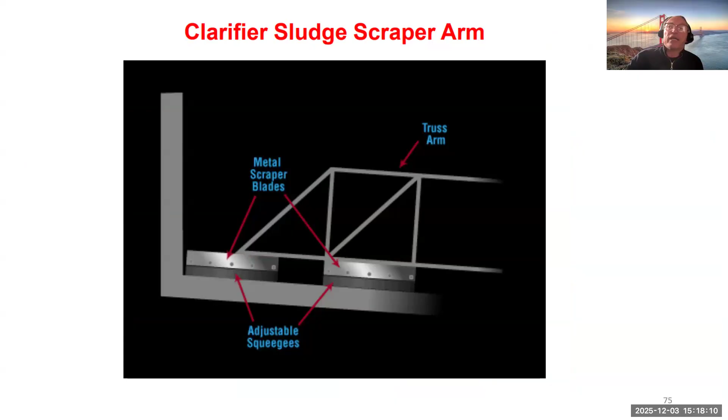Here's a scraper arm. If you look a bit more closely near the bottom of that picture, you can see those scrapers moving the sludge along. At the bottom there are often adjustable squeegees that can wear out, and periodically you have to drain down the clarifiers and check the adjustment and integrity of the scrapers.

There are also ways to improve solids removal by using a DAF unit. Basically, it's dissolved air that's bubbled into the wastewater, and it can help things like fats, oils, and greases float to the top more easily. If you see those angled lines in that DAF unit, those are called lamella plates, and they facilitate settleable particles to settle more rapidly.

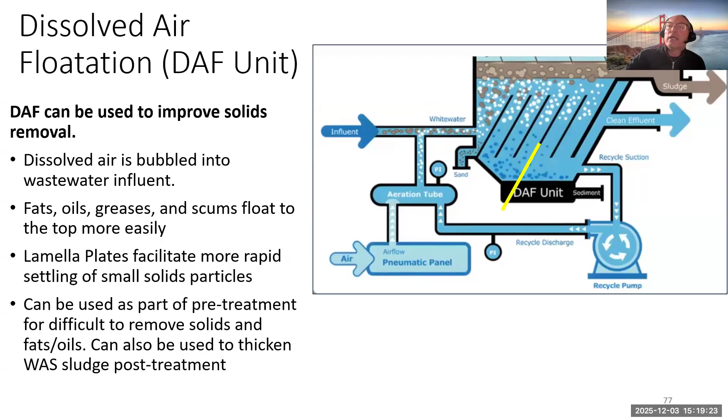In general, a primary clarifier should remove between 40 and 60% of the total suspended solids, and you could test for that before and after. It should remove 20 to 50% of the BOD, and you could do a BOD test before and after the primary clarifier to see how well it's working.

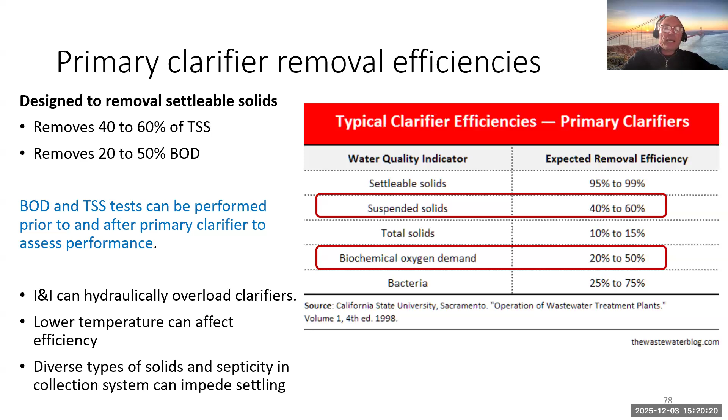Remember that if you have I&I, heavier flows during the wet season, it can hydraulically overload these clarifiers. Low temperatures can affect them, and different kinds of solids can impede the settling. For detention time, typically it's 2 to 3 hours.

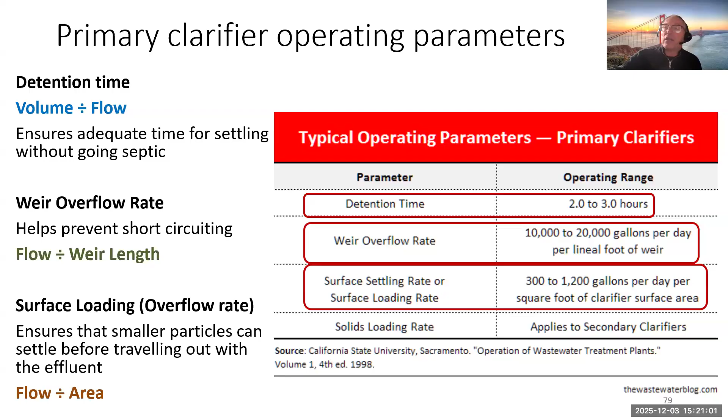We have a couple of different ways to monitor how well our tanks are designed. There's weir overflow rate, 10 to 20,000 gallons per day per linear foot of weir. Then there's surface settling rate, also called the overflow rate, which is flow divided by area. The purpose is to make sure particles have enough time to settle before they reach the effluent trough, and that should be somewhere between 300 to 1,200 gallons per day.

I'm going to show you an example. We have a primary clarifier with a diameter of 65 feet, a depth of 12 feet, and the plant flow is 1,900 gallons per minute. What is the detention time in hours?

For the sake of time, I'll show you the solution. The detention time, as Daryl showed us yesterday, is volume divided by flow. So we calculate the volume using the diameter and depth: d squared times 0.785 times the height to get cubic feet, then multiply by 7.48 gallons per cubic foot. So 65 times 65 times 0.785 times 12 gives about 300,000 gallons.

297,700 gallons is the volume of this tank. If I divide by the flow of 1,900 gallons a minute, the gallons cancel out, leaving minutes: 156.7 minutes. But we want our answer in hours, so I divide by 60 minutes per hour, and I get 2.6 hours. We wanted our detention time to be between 2 and 3 hours, and we're right in that ballpark.

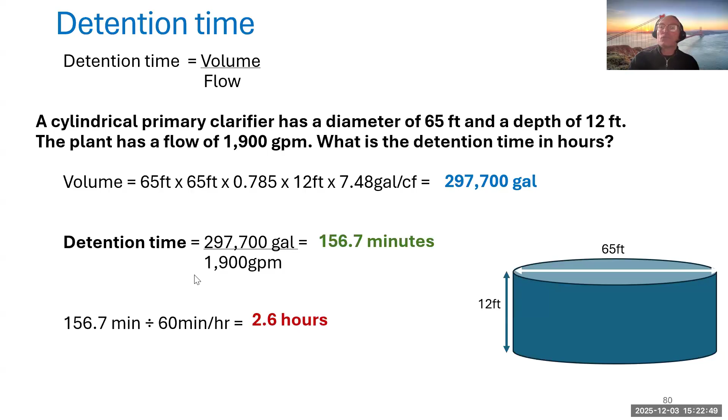Now, the weir overflow rate is important to make sure we have enough time for particles to settle and not create any excessive current velocities near the effluent. We want it to be nice and quiet - the water should be almost standing still in a clarifier.

So here we have the same clarifier. It has a diameter of 65 feet and a flow of 1,900 gallons a minute. What is the weir overflow rate in gallons per day now per foot of weir? The weir in a circular clarifier is the circumference of the circle, because the weir goes all the way around the perimeter of that circle. So we're going to need to calculate how long that weir is.

Now, that's the circumference of a circle, and the circumference is pi times the diameter. So if we take 3.14 times 65 feet, we'll get pretty close to the length of the weir. If you use the symbol pi, you'll get a slightly different answer because it has more decimals. But the length of this weir is 204 feet.

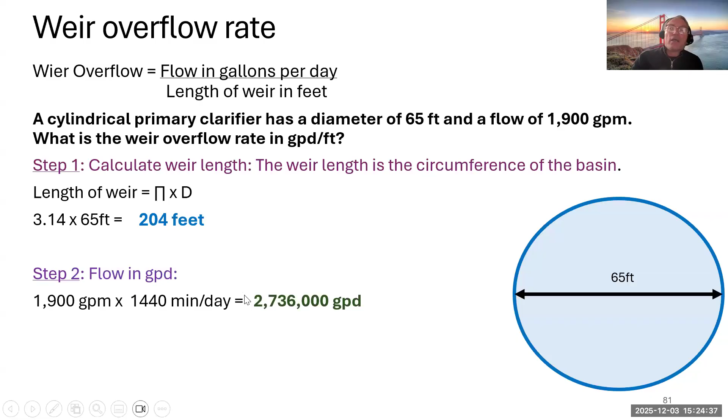So if we look at the formula at the top, the flow in gallons per day divided by the length of the weir in feet. Now our flow is given to us as 1,900 gallons a minute. I'm going to multiply that by 1,440 minutes in a day, and I get a total amount of flow of 2,736,000 gallons per day. If I simply divide that by the 204 feet of weir, I get 13,412 gallons per day per foot.

And the range that we were looking for was somewhere between 10,000 and 20,000 gallons per day per foot, and we're right in the ballpark there. If it was faster, it would mean that we're creating velocity currents that could be carrying solids into the effluent.

And the final one that we can calculate is the overflow rate, and this has to do with the ability of the wastewater to settle correctly. So in this one here, it's the same diameter, same flow, but what is the overflow rate in gallons per day per square foot?

We do the same calculation, 1,900 gallons a minute times 1,440 minutes in a day, and we get that same flow, 2,736,000 gallons per day. Then we did the area - 65 diameter squared times 0.785 is the area. That is the area of this tank, 3,316.6 square feet.

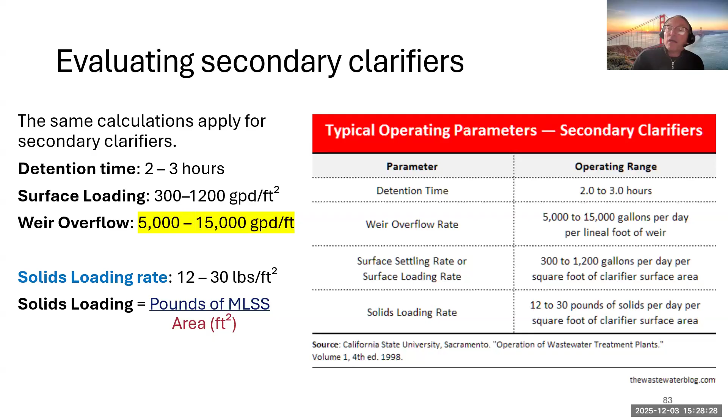And there's one additional process control test we can look at, and that's the solids loading rate. What we're looking for is 12 to 30 pounds of solids per day per square foot of area. So if you look at the pounds of MLSS that are going into the clarifier, divided by the area in square feet, that would let you know are we between that 12 and 30 pounds of solids per day. I'll give you an example here of that.

Here we have a secondary clarifier. It has a diameter of 72 feet, and it has a flow of 2,900,000 gallons, and the MLSS concentration is 2,800 milligrams per liter. So we have to do a pounds formula first to see how many pounds per day of MLSS that we have.

And you notice what I did there. Instead of 2,900,000 gallons per day, I just moved my decimal place to the left 6 spaces, and called it 2.9 MGD times the 2,800 times 8.34, and we get 67,721 pounds per day of MLSS that's going to the clarifier.

And we calculate the area, diameter squared times 0.785, and we have a total area of 4,069 square feet. We do a simple division here, and we get 16.6 pounds per day per square foot being applied to that clarifier. And that is between 12 and 30 pounds per day per square foot, so we're right in the ballpark.

And we're pretty much out of time, and I'm going to leave you with this last poll here. I'll give you however much time you want. If you're able to calculate this, give a minute or so, and then we'll show the solution. And if Lori has questions for us, we'll answer those. Any questions that I can't answer live today, I can answer and send to you by email.

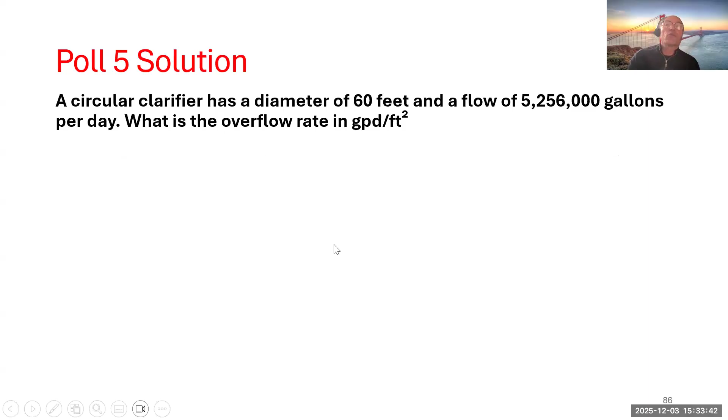All right, for the sake of time, I'm going to start showing the solution to this poll, and then we're going to do our best to answer the questions here and wrap this thing up for the day. So let me just make sure this matches. Okay, good. So we have a circular clarifier that's 60 feet in diameter, and so we're going to do d squared times 0.785 to get the area.

And we have a flow of 5,256,000 gallons per day. So we want the overflow rate in gallons per day divided by the square feet. So we simply divide that 5,256,000 gallons per day, and we get 1,860 gallons per day per square foot.

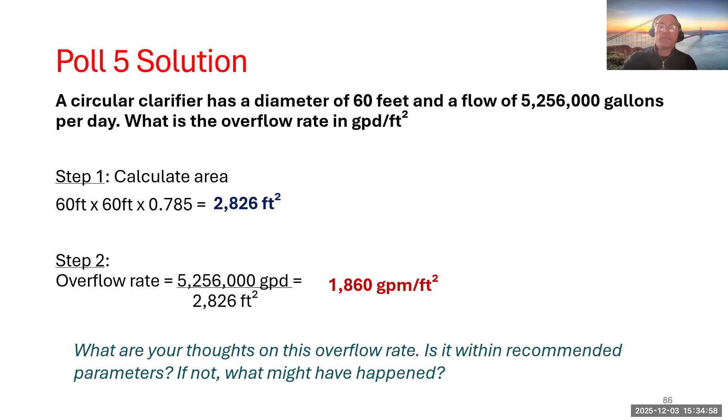And look at some of these questions. The first question here is from Palermo, thank you for this question. In conventional aeration, continuous flow plants, a lot of the sludge beds of the final clarifiers becomes an unintentional anoxic zone, leading to floating sludge via denitrification. Are there any simple procedural tricks to reduce the likelihood of those beds overturning, or are major plant upgrades the only remedy if it's an ongoing and persistent issue?

It may be that I've seen some designs where they followed with a final oxidation stage before going into the secondary clarifier. I imagine it's possible, and you've probably already checked this, but it's possible that some of these types of problems could be due to sludge removal equipment, where there's a little bit of sludge left in the clarifier that's causing the rising sludge.